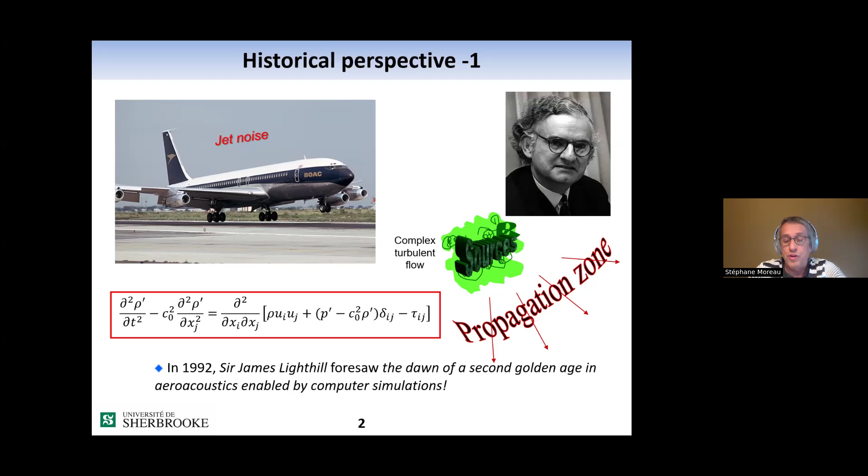But even if Sir James Lighthill was more of a theoretician, in 1992, in a seminar that he gave, I think at an ICASE symposium, he foresaw the dawn of a second golden age in aeroacoustics that was enabled by computer simulations. And indeed, 10 years later, two reviews, one in Progress in Aerospace Sciences by Colonius and Lele, and the second one in the Annual Review of Fluid Mechanics by Wang et al., showed the first CAA applications and also the potential of LES, large eddy simulation, for noise prediction.

Yet at the time, only simple canonical problems were tackled. I'm showing one at the bottom left, which is a shear layer simulation. Then at the top right, a forced jet without nozzles. And then the first wall-bounded case, a slanted flat plate trailing edge computed by Meng Wang.

10 years later, again, another review, this time proposed by Lele and Nichols, basically confirmed Lighthill's statement. They mentioned that we had reached the second golden age of aeroacoustics, and that the progression was from simple idealized configurations isolating specific unsteady flow processes to more complex flow problems with realistic geometry. They also mentioned that greater fidelity in capturing a range of turbulent flow scales, and thus the noise generation processes associated with them, was also apparent.

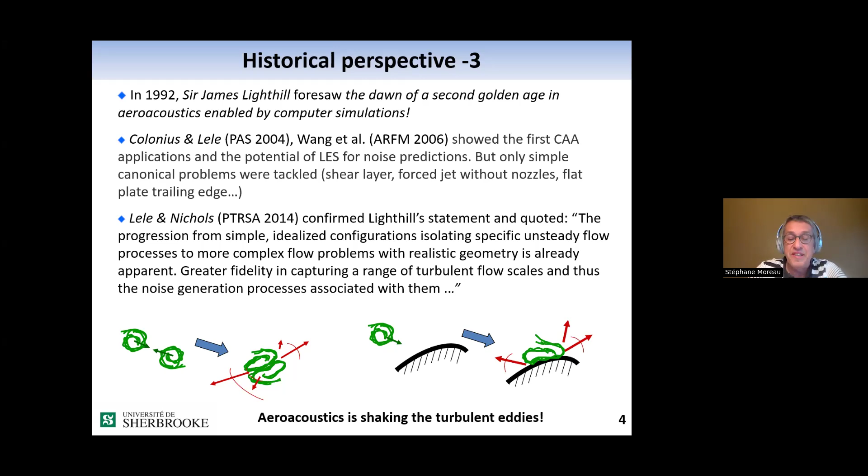Now, how do we simulate that? This is a sketch of all the numerical methods for noise prediction. To illustrate that, I'm splitting the problem in three steps, sketched on the left, where the first step is defining the excitation, which could be either acoustic or vortical. Then you can simulate or model the response of the blade. This will be the unsteady loading on the blade, which are equivalent dipoles that can then be fed into some analytical model or acoustic analogy to get the far field sound.

Now, all these steps can be analytical, and that will be the cheapest way of getting the far field noise. Or you can even provide some of the input data from classical CFD solvers performing RANS simulations. All of this analytical approach is cheap, but it's only for simple source mechanisms and very simple geometry. Actually, we always deal with flat plates, infinitely thin flat plates.

Now, if you want to move to more complex source geometries, we can start using classical CFD solvers on the actual geometry, and then we feed that to some acoustic analogy to get the far field. This is fine. This is a little bit more expensive because now you need to resolve the source region, but you cannot really capture any feedback loop mechanisms. And also you have a strong assumption on the propagation. You don't account for complex installation effects.

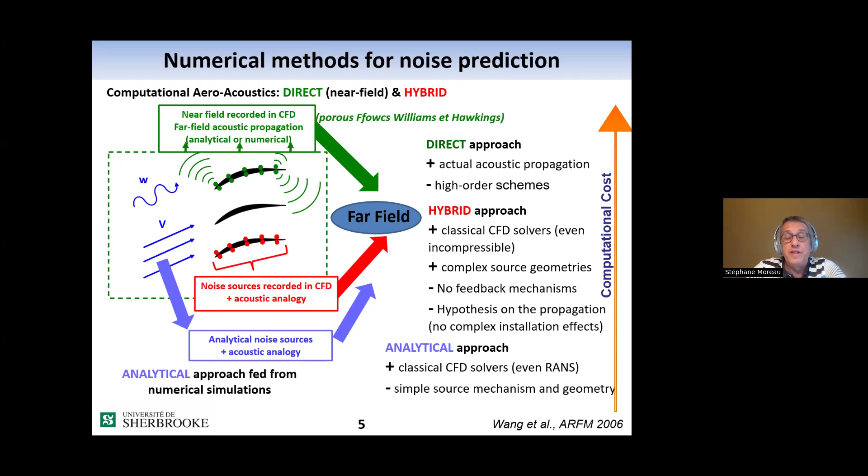All these ideas are basically summarized in the review by Wang et al. in the Annual Review of Fluid Mechanics. Now, going into the possible computational aeroacoustics methods. So now we want to simulate the acoustic sources either in free flow for jets or on solid walls. And we want to do some possible coupling, as I said, with an acoustic analogy for the far field

propagation. The simplest way, if we are interested in deterministic problems, will be unsteady RANS, where you compute the unsteady mean flow field, but with turbulence modeling. So you don't resolve any of the turbulence. Everything is modeled. Now, one thing that is important if you want to do a CAA problem, you still need to have low dispersion and low dissipation schemes. This is needed. And this will provide some tonal noise.

Now, we know that in most problems, it's not only a tonal noise problem, but also a broadband noise problem. If we want to resolve the turbulence, we have 2 options. Either we can use large eddy simulation, where we resolve only the large eddies and we model the small ones, or we resolve everything, which is the direct numerical simulation.

Now, there we have 2 options. One is using the lattice Boltzmann method, which will be very efficient, as we will show, for low Mach number flows, because we use a very compact stencil for it. And again, we will benefit from low dispersion and low dissipation for the acoustic propagation, or we need that.

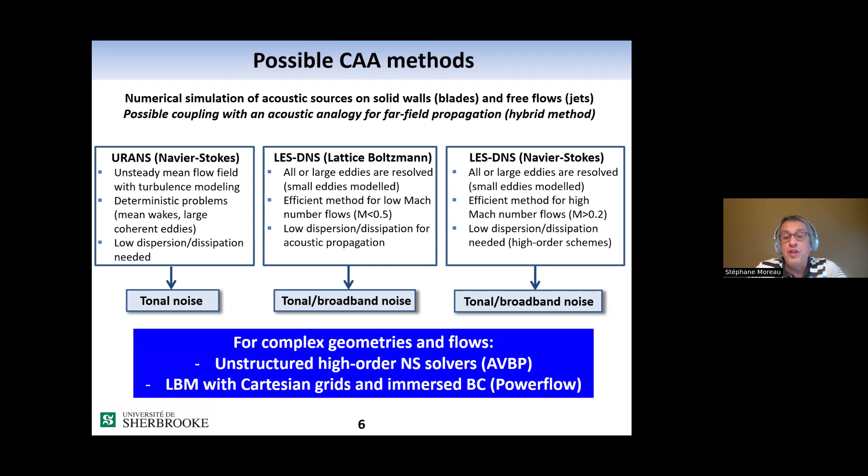Now, for complex geometries and flows, which is really the main focus nowadays, 2 methods have emerged as good solutions. One is the unstructured high-order Navier-Stokes solvers, and I will give examples with the AVBP solver, and the lattice Boltzmann method with Cartesian grids and immersed boundary conditions. And I will give examples with PowerFLOW.

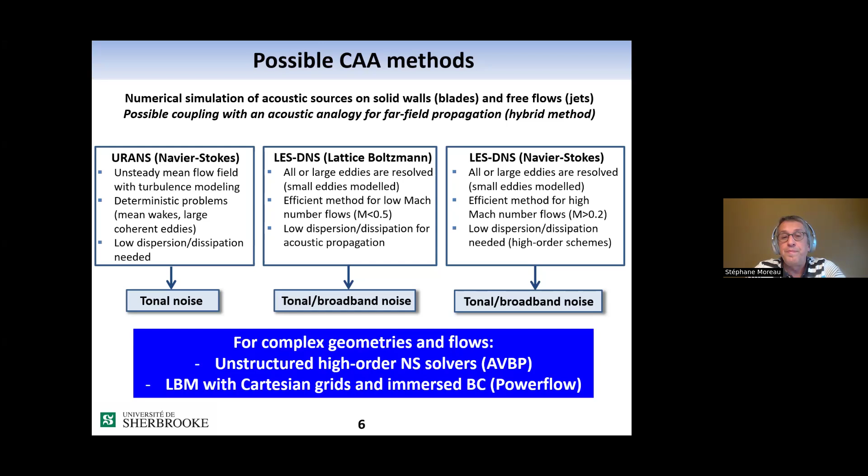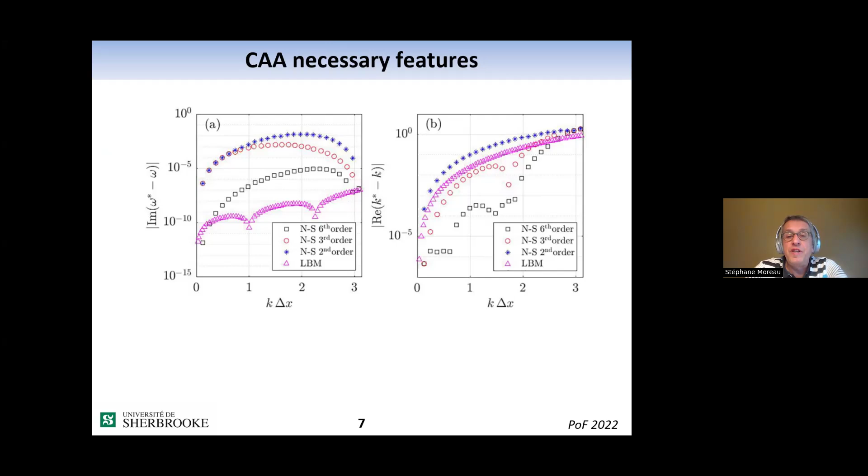Now, I mentioned in all these CAA methods, we need to have low dispersion and low dissipation, which are 2 properties required for a CAA problem. And here I'm comparing classical Navier-Stokes finite difference schemes with the lattice Boltzmann method. On the left, I'm showing the dissipation properties. And you see that the LBM is better, actually, or equal to the 6th order Navier-Stokes finite difference scheme. And in terms of dispersion on the right, it's equivalent to a 3rd order scheme.

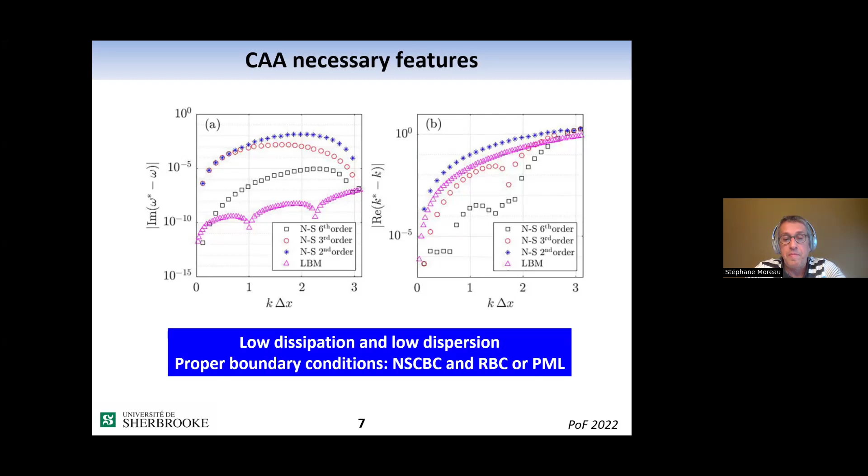So the other thing that I want to insist on: not only do you need these properties for the schemes to be able to simulate properly the noise sources and propagate them, but you also need to have the proper boundary conditions. And for that, you need non-reflecting boundary conditions, like the Navier-Stokes characteristic boundary conditions or the radiative boundary conditions developed by Tam. Or you use absorbing, so perfectly matched layer boundary conditions, which are absorption sponges, basically, to absorb acoustics. So you need that.

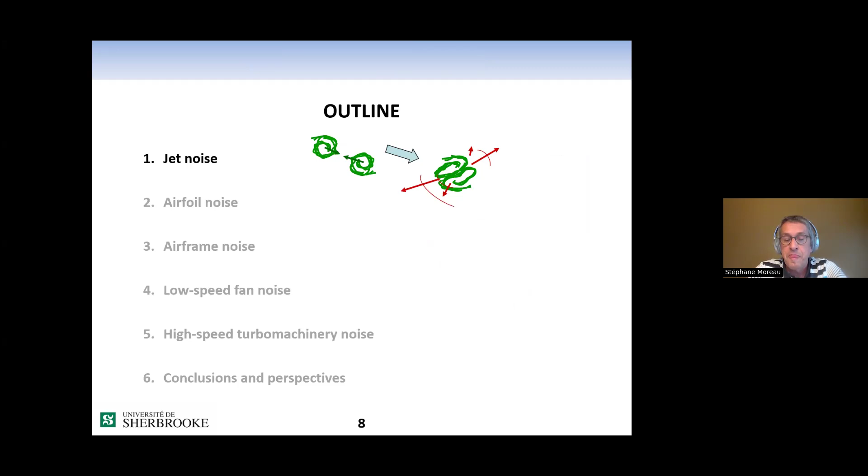Now, let's get into some of the applications, starting with the first case where we have just colliding turbulent eddies, so free flow, and I will consider jet noise, which historically has been, I would say, the main workhorse in aeroacoustics. Now, what we're able to do nowadays is to simulate cold and hot jets with nozzles. And I'm going to illustrate that on 2 different nozzles, one strongly convergent, the ARN2 nozzle from NASA, and the slowly converging nozzle from Jean, that was tested at Pprime in Poitiers.

And I'm showing at the bottom some of these unstructured grids. And one particular feature that we've been developing is to be able to do automatic tripping by removing some of the grid cells near the nozzle exit, which I will call an industrial tripping device. And to be able to evaluate how we perform, I'm going to look not only at the center line of the jet, but also at the lip line, which is the critical one, and also the radial evolution of this jet.

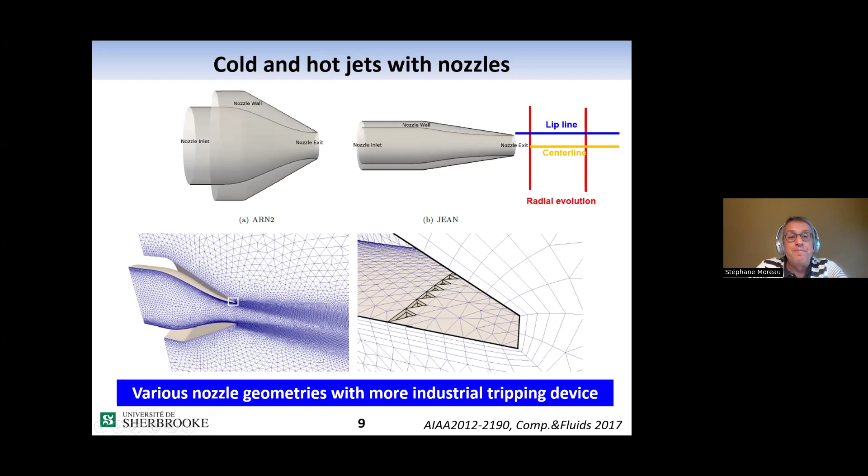So first, starting on the center line, top left, I'm comparing basically the mean flow along the center line on the left, and then the RMS on the right. The symbols and the black line represent Bridges' experimental data, and the pink squares represent the experiment from Jordan, so from P prime. And in red, you see that we are capturing now really the potential core quite well.

And that's actually a significant improvement even compared to the first LES simulation that Bodony performed in his PhD. And you see also, comparing the red and the dashed blue, the difference between a hot and a cold jet. Now, in terms of RMS, we see that we are also capturing quite well the evolution of the RMS and especially the peak.

Now, on the more critical lip line at the bottom, we see that we capture also the mean flow quite well, the evolution, compared to Bridges' experiment, and also the RMS. So now we are also able to capture the evolution along the lip line. And in terms of radial evolution, here I'm comparing only to the P prime experiment, all the RMS values for the three velocity components. And you see that we're actually matching quite well the evolution and the ratio between the different components.

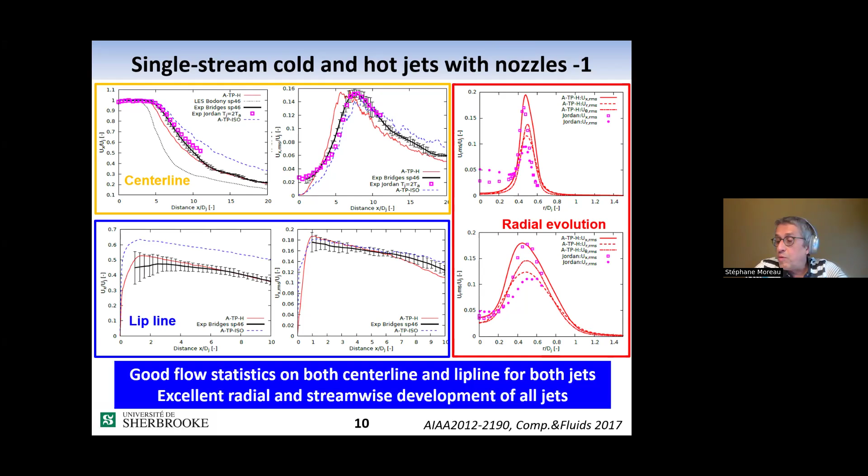So overall, we have good flow statistics on both centerline and lip line, and we have excellent radial and streamwise development of all jets. Now, what about the acoustics? Here I'm comparing spectra at three different angles with respect to the jet axis, and also the overall sound pressure level as a function of this angle. You see that for the three different angles, we are actually comparing very well with the P prime experiment. And you see also the difference between the hot and the cold jet.

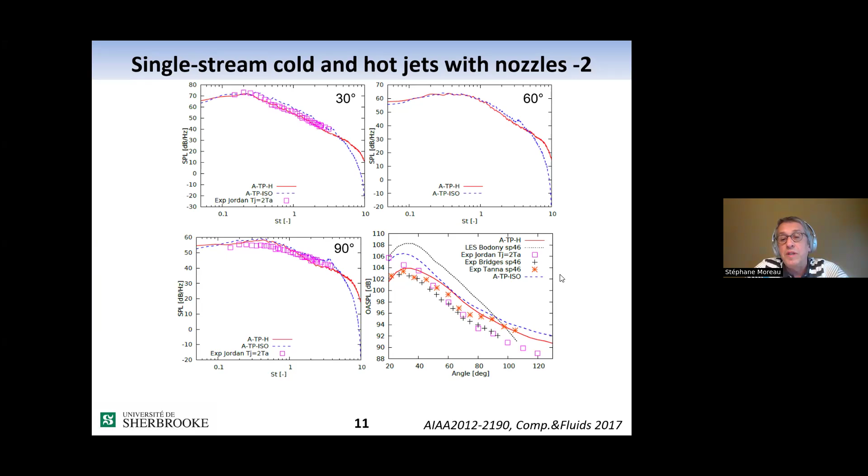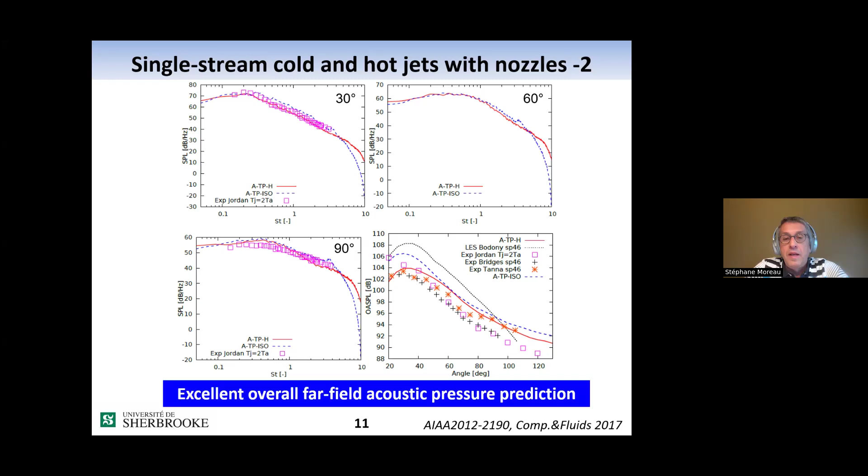Now, in terms of overall sound pressure level evolution in terms of the angle, we see also that we are matching quite well with all the experiments from Jordan, Bridges, and Tanna. And again, there is quite a significant improvement compared to the first LES by Bodony. Now, this is for single stream jets, subsonic ones.

What about supersonic jets? Here I'm comparing another simulation we performed on an under-expanded supersonic jet that was tested at École Centrale de Lyon, at the LMFA lab, and also at VKI, by the way. And I'm comparing on the left the flow field, so the evolution of the mean Mach number along the axis, and the level of URMS also along the axis.

On the center line and lip line, you see that we capture very well the shock cells, and we achieve a better comparison with the experiment, especially for the latest shock cells, and also our capture of the lip line is much better.

And now on the right, you see the acoustic prediction for all different angles, and you see that we match very well, actually, the LMFA experiment, except that because of the tripping, we don't have the tones, so we don't simulate the screech, but we have the broadband captured very well.

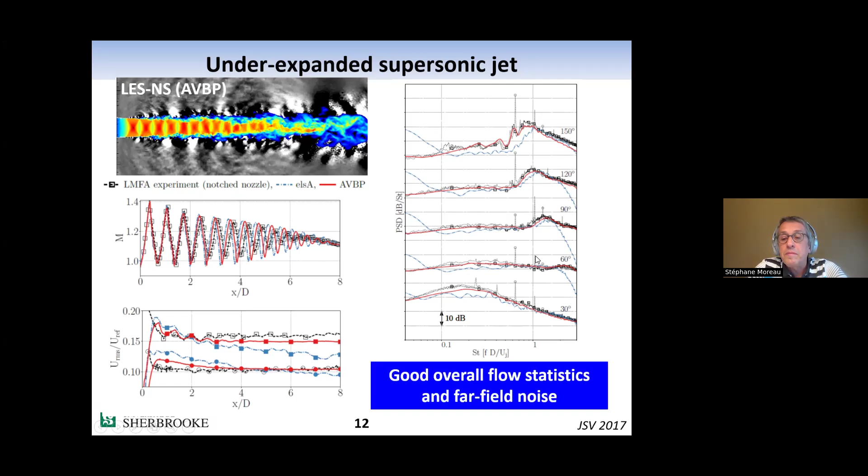Now, moving to the very realistic one, where we compute the dual stream jet with nozzles. Here I'm comparing with the EXEJET test that was performed at Onera, which is a scaled version of the afterbody of the CFM56. On the left, you see that the AVBP simulations are comparing quite well to the PIV measurements performed at CEPRA 19.

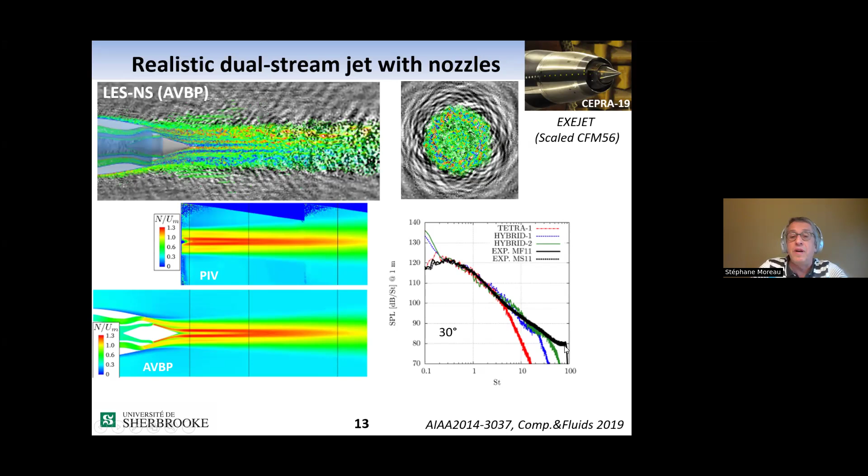And on the right, you see also the sound pressure level as a function of Strouhal number. And you see that with increasing grid resolution, we capture the high frequency very well. So we have good flow and far field acoustic pressure predictions with this industrial tripping method. Now, where do we go from there?

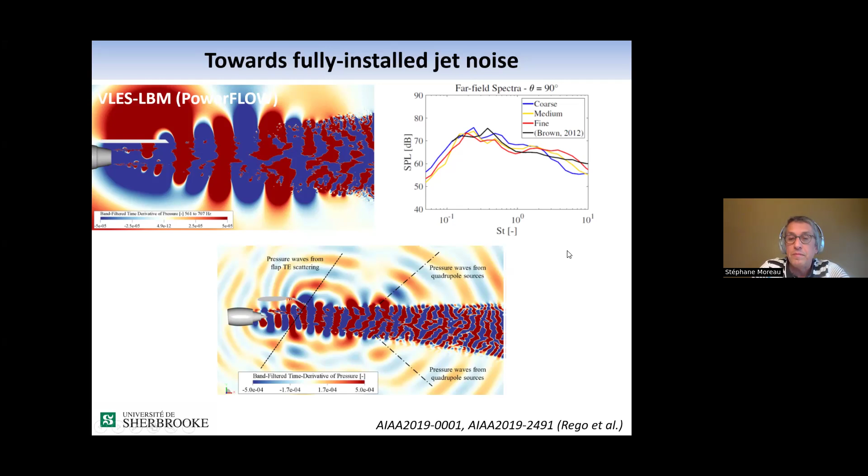And then a more realistic configuration where there is a high lift device put above the jet. And again, we get very good prediction and accurate description of the interaction. These are all simulations performed by Rego et al. Now, moving to the second case, where we have an interaction of turbulent eddies with a wall.

The canonical model for that canonical problem is the airfoil noise first. And in this case, we actually try to simulate what happens in actual open jet wind tunnels. And I'm showing on the right our wind tunnel at the Université de Sherbrooke. And on the left, I'm showing a typical instrumented mock-up, and this is the controlled diffusion airfoil that I've been using for many years, and I will be comparing to that. And the trend basically since 2012 has been to move towards more DNS cases and fully installed configuration to also sort of understand what's going on in the experiment.

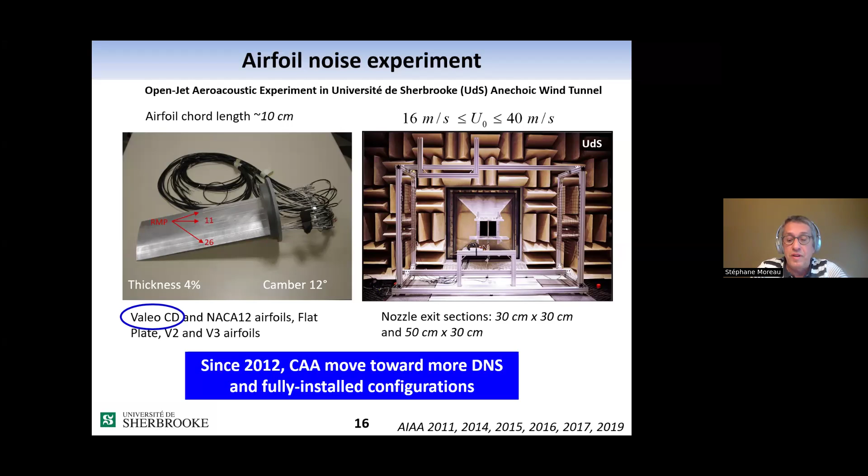Now, this is what I mean by installed configuration. This is basically the lattice Boltzmann setup that we use, where we basically place the airfoil in the potential core of the jet. We simulate the nozzle lips here, and this is basically the École Centrale de Lyon setup, so with a little contraction in one side. If you do that, actually, you're able to capture quite well the loading on the airfoil. If you do free flow computation, you don't, okay? And you see that all this high fidelity simulation, so LES and DNS, are comparing quite well actually with the experiment.

The only differences are mainly in the laminar separation bubble that is developing at the leading edge that we see actually in the animation at the bottom. And you see that only the DNS are actually able to capture the size of this bubble quite well, and also the consequent favorable pressure gradient region that you have in the front of the airfoil.

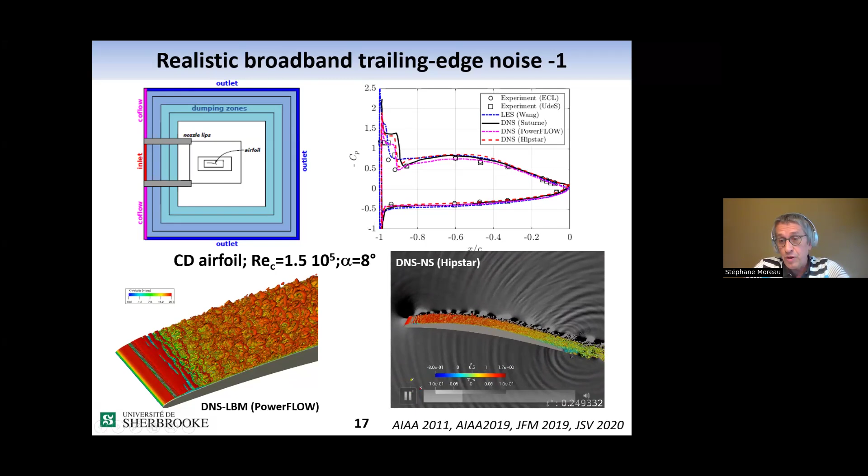Now, in terms of features, as I mentioned, we have this very thin laminar separation bubble that develops. You have these rollers that will form, that will eventually break down, and then you have a forest of hairpin vortices developing along the blade with an angle that will be increased due to the APG zone near the trailing edge. Now, on the right, I'm showing also in the background in gray the dilatation field, and you see that actually for this particular airfoil, the self noise is not only trailing edge noise, but you have also an additional source coming from the laminar separation bubble, and also another one that is developing actually in the wake.

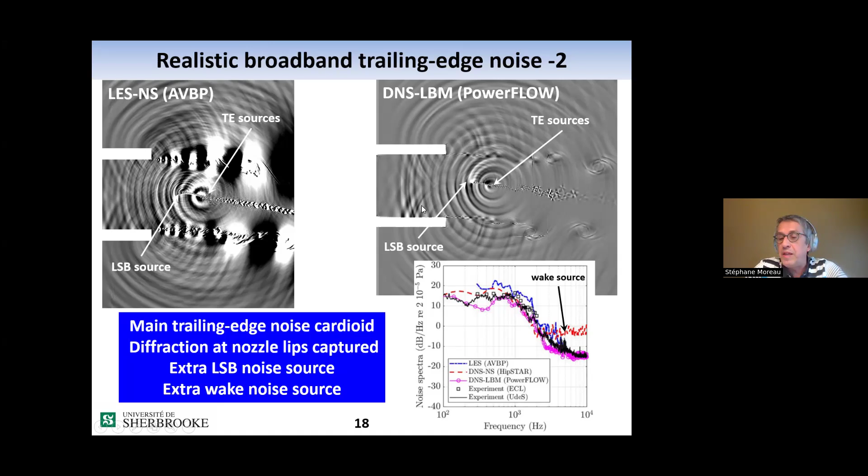Now, if we consider the other cases, so the LES Navier-Stokes with AVBP, we get basically the same sources, okay? And you see also the same thing with PowerFLOW. Now, if we compare to some experimental measurements of the far field noise spectra, you see that now we're able, with this high fidelity simulation, to capture quite well the trend. And as I said, because we have this installation, we also see the diffraction at the nozzle lips very well. We also see the sort of cardioid shape due to the non-compact trailing edge sources. And then we have these extra noise sources due to the laminar separation bubble and the wake. This was at design, so at 8 degrees.

Now, if we move to a lower angle of attack, experimentally, we saw that we were getting some tonal noise, and especially at 5 degrees, we had some very intermittent, so highly modulated tonal noise. And we performed the simulation of this case, and you can see in the background this tonal noise generated with the fading colors, showing that this is actually a tone that varies in time.

And we were able to explain this phenomena with the DNS, where we showed that we had a sequence of quiet events and intense events near the trailing edge that were due to these rollers that were either small, smooth, and not very energetic, or big, strong, and creating a strong breakdown near the trailing edge. And that's basically creating this laminar boundary layer instability noise.

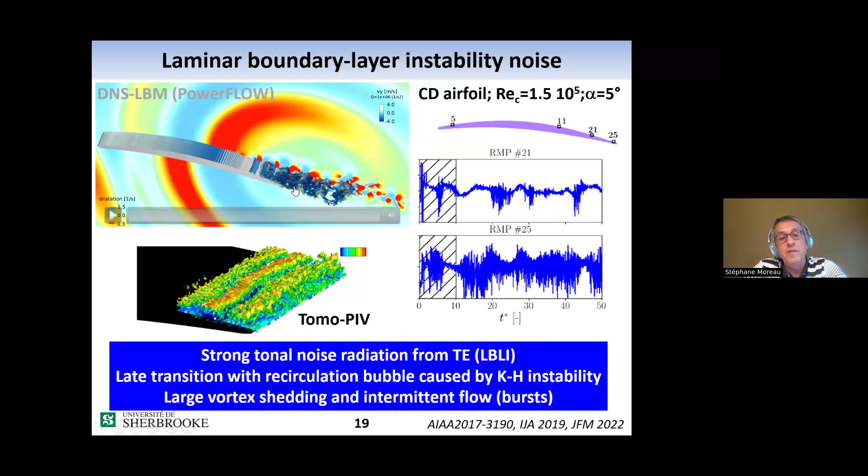And the main source that we found was the Kelvin-Helmholtz instability that was developing in the laminar separation bubble that is situated close to the trailing edge at this particular angle of attack. Now, these rollers were actually verified experimentally by tomo PIV, where we showed that we had these big structures and confirmed the DNS LBM results.

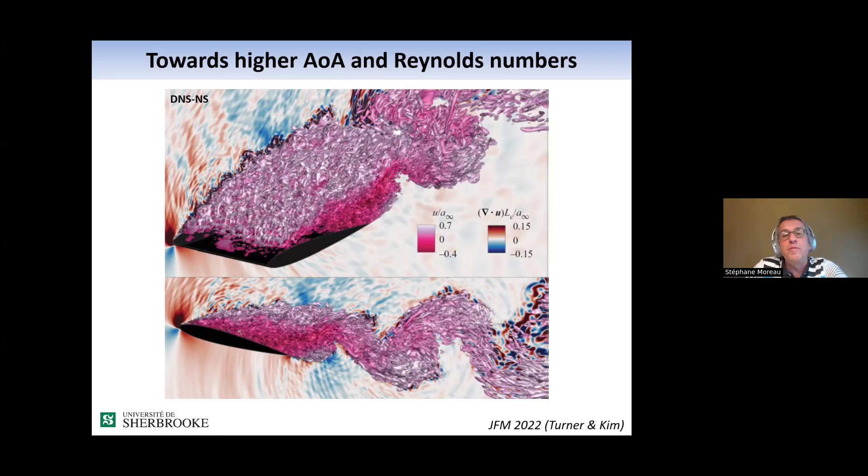Now, where do we go from that? Now we are actually moving, I would say, towards higher angle of attack and Reynolds number. And I'm showing here an example that was performed in 2022 by Jacob Turner and Kim, where they performed basically this very high angle of attack DNS, but it's still at a quite low Reynolds number. So I think the trend will be to increase the Reynolds number and also consider more high angle of attack.

Now moving to a more complex case, airframe noise. We did first a full simulation of a simplified high lift device where you have basically a flat plate with a flap, which is a NACA 12 airfoil with different positions. And we basically simulated, that was part of an EU project called Valiant. And some of the experiments were performed at École Centrale de Lyon. And that's basically the configuration we've been simulating with AVBP.

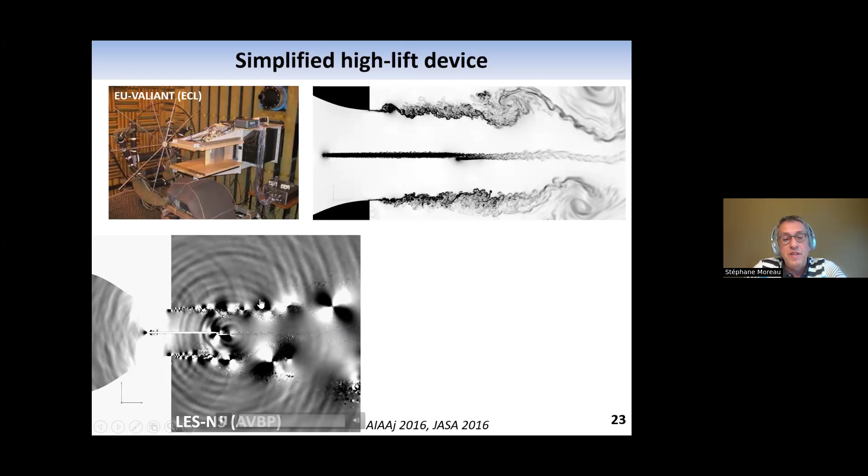And you see basically the evolution of the flow field and also of the acoustic field. So this is again dilatation field contours. And what we showed is that we were able to have good flow statistics and far field with AVBP. We showed that we had a strong influence of the jet shear layers here, because you see that there is a sort of a change of orientation, so refraction through the shear layers. And then we have also diffractions coming from the nozzle lips. And all of this will create the oblique fringes that we see actually in the experiment.

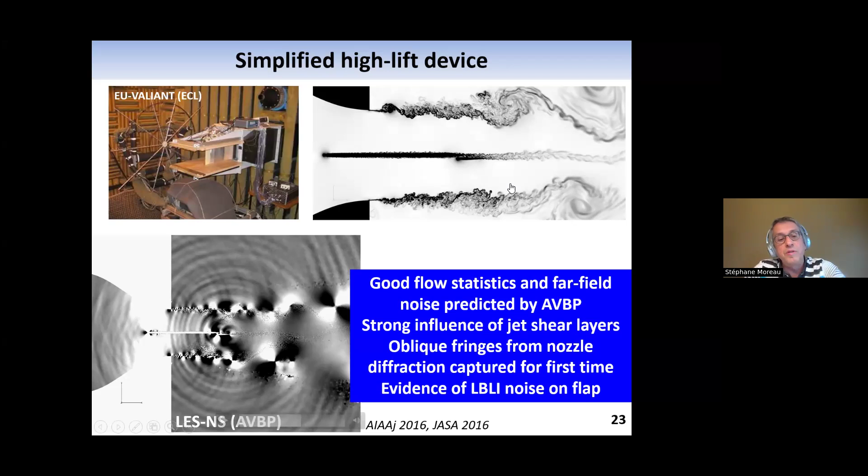And then the other thing that we explained was basically we saw some evidence of laminar boundary layer instability noise on the flap because of the low Reynolds number of this guy. And that was actually shown also experimentally.

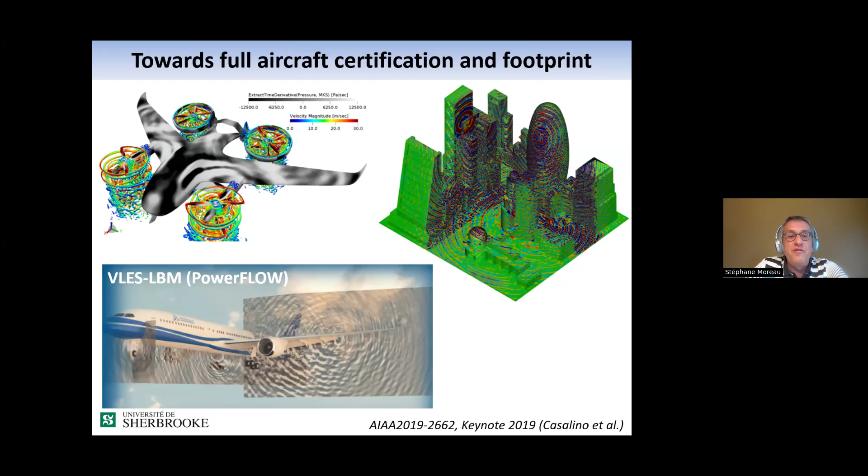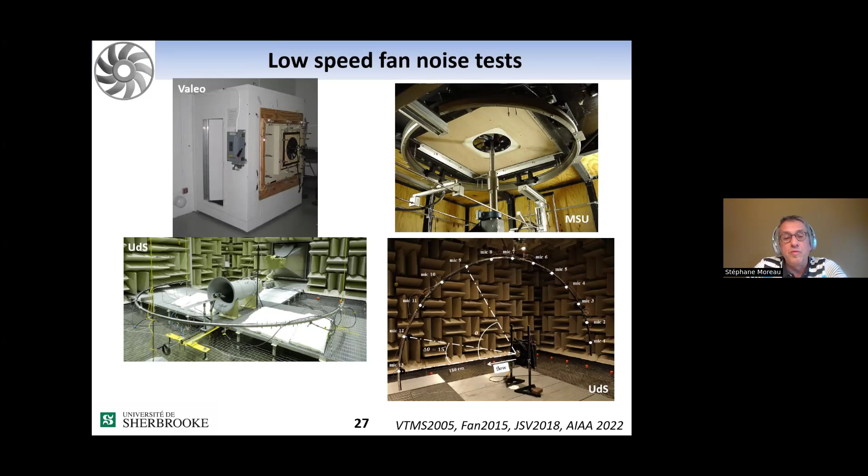Now, moving to the more complex rotating machine cases, and starting with the low-speed fan noise. And for this, we usually simulate the configuration of the fan as it is tested, which is usually flush mounted in a board or mounted on some module, as shown at the bottom right. So I'm going to show some examples of these two.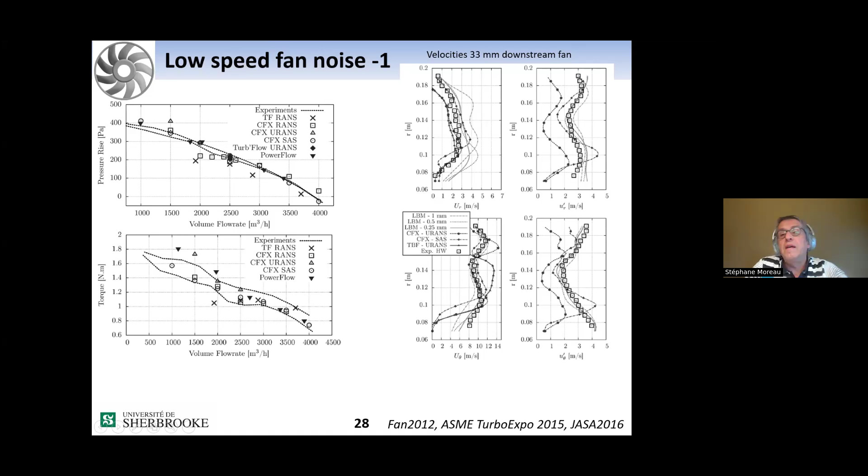Now, this is confirmed also by comparing the detailed velocity statistics in the wake, where we did some hot wire measurements 33 millimeter downstream of the fan. And especially, I think, only the highly resolved simulation and fine simulation were able to capture actually the radial component correctly, and also the RMS value of it, and basically the shape also of it as a function of radius. So good overall performance agreement, better prediction with unsteady SAS and LBM cases.

Now, the most, I think, important results that we obtained on this fan was the issue of having huge subharmonic humps. So this is the blade passing frequency here. The tone that is emerging, and the other in front of it, you see that you have these huge subharmonic humps, and we have three of them, okay, that are sort of a harmonic of the first one.

So in black is basically the experiment, and you see in colors all the other results from the lattice Boltzmann simulation, coupled with the Ffowcs Williams-Hawkings analogy for all the cases in blue, green, and brown. In red, it's the direct simulation, and you see that at the low frequency, we have some extra tones here, and this is due to the fact that we have this mass flow extraction. So these are duct modes that are actually excited at the outlet. So this is a spurious effect of the simulation.

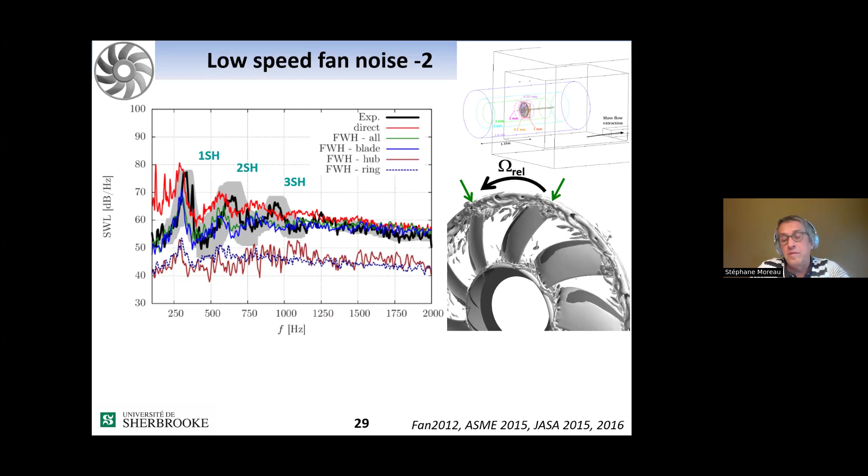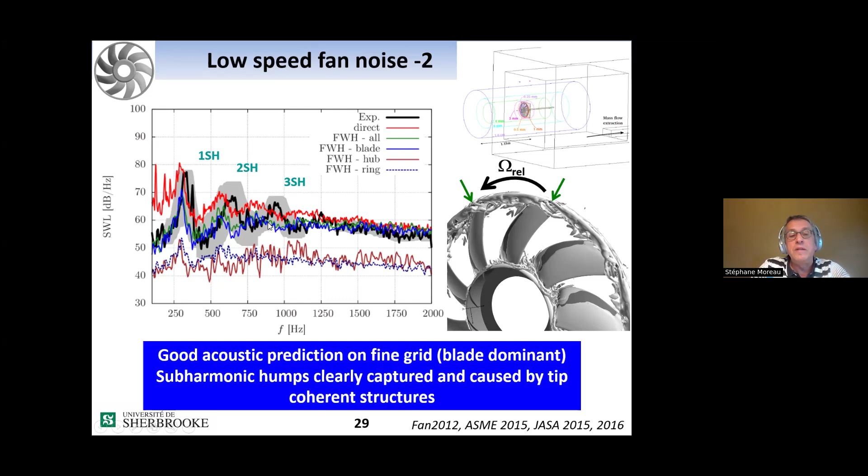But you see that all our simulations, either in the direct case or in the acoustic analogy, are now predicting quite well actually the three humps. And we were able to basically explain these 3 humps by these large coherent structures that are forming in the tip gap that are re-ingested and chopped basically by the blades. So these subharmonic humps are clearly captured and caused by the tip coherent structures that are formed. Now, one other thing I forgot to say is that also we showed that the blade is really the dominant contributor compared to the hub and the ring.

Now, this has been found also in other cases, and I'm showing here a more recent simulation we did on some urban air mobility ducted fan configuration that you see on the top left, tested in our anechoic tunnel. And you see at the bottom the prediction, the sound pressure level, so the noise spectra comparison between experiment in red and purple, compared basically to all the LBM. And you see that we are actually able to capture quite well all the phenomena. And again, we capture quite well also the subharmonic humps that were forming on this fan.

And we then explain that by the tip vortices, both the tip leakage and the tip separation vortices that stay in the rotational plane and that are creating this intense wall pressure fluctuation at the tip and creating consequently these large subharmonic humps.

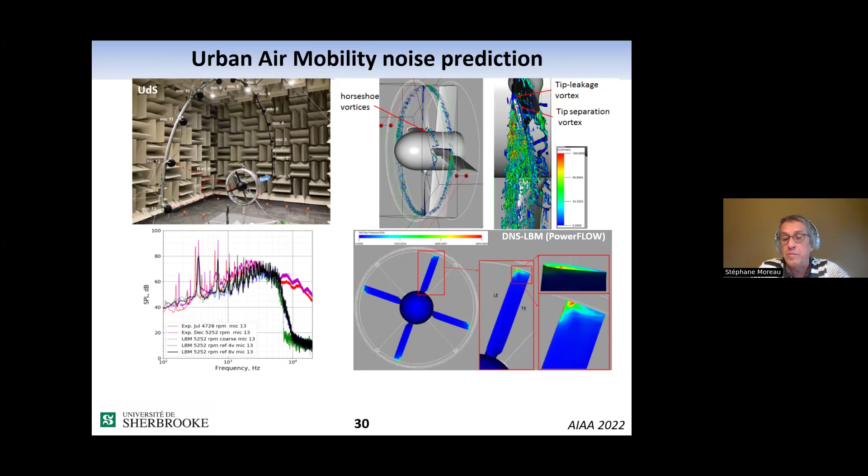And you see that we have a very different flow topology. In the deep stall, we have all these vortices that are basically impacting on the mast and on the consequent blade that are sort of re-ingested, whereas at max efficiency, everything is basically triggered by impact on the side plates.

And you see at the bottom basically the comparisons of the noise spectra again for these 2 configurations. And you see that the Lattice-Boltzmann method is capturing quite well. So either with the Ffowcs Williams-Hawkings analogy in blue or the direct probe in gray, we are basically capturing the black experimental spectra for both cases. So we get good noise prediction, and again, this allowed also to have a good source localization.

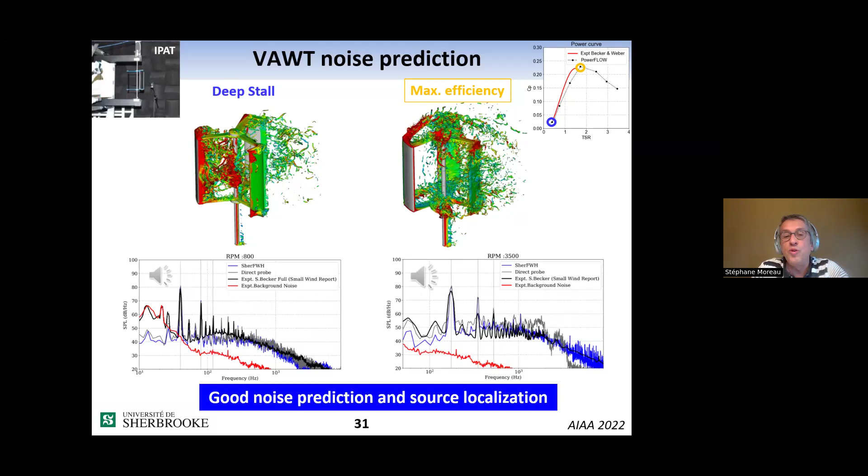Okay, to conclude this part, we've done also a systematic comparison on this H380 C1 fan, where we moved actually from a single fan simulation to a fan system and then a fan system plus a rotating obstruction.

So we are getting more and more complex cases. And I'm showing on the right all the simulations we performed with different flow solvers, the grid size also, and more importantly, the duration of these simulations. And you see that for the fan itself, all the unsteady simulations are the same order of magnitude, okay? Except, of course, the RANS, but the RANS doesn't give you the noise directly. But all the others are the same order of magnitude for the same number of revolutions of the fan.

But as soon as we move on to the fan system, and more drastically, I would say, the fan system plus rotating obstruction, we start having quite a big difference, as we see that the LBM with the fan system is about 1 order of magnitude, so 10 times faster than the URANS, and then we get even 2 orders of magnitude in the case where we also consider these 2 rotating systems. So this is, I think, for low speed applications, an increasing advantage of the Lattice-Boltzmann method over the classical Navier-Stokes with system complexity.

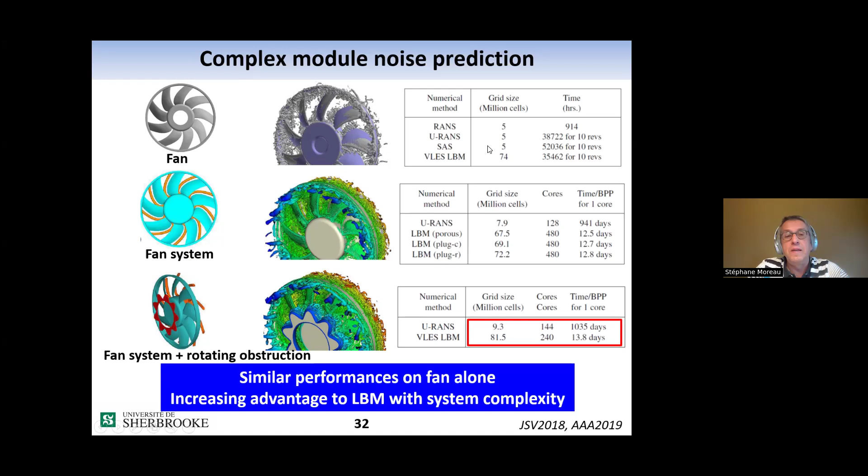Now, this is for low speed machines. If we move to high speed machines, the first case we considered was a compressor, the low pressure compressor CME2. And I'm showing here on the left the large eddy simulation we performed on a smaller span configuration, and on the right the URANS we performed on the complete stage.

With this configuration we didn't have any experimental data, but we showed some technological effects on tonal noise with the URANS, especially the effect of viscosity, thickness, and camber, so that we could estimate the validity of our analytical models. And we also showed the critical role of the span-wise coherence length in the broadband noise. And by the way, it was also surprising to see that transition was only occurring at mid-chord, especially on the stators, and not really at the leading edge as we were expecting before.

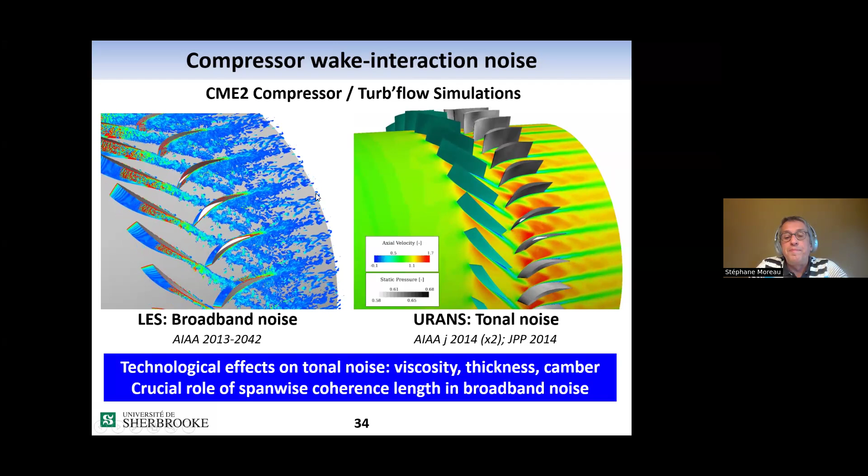Now, the second case was a high-pressure turbine case, which is the MT1 transonic turbine from Oxford. And we did there both clean inflow and also inflow with some planar entropy waves. So this is the clean inflow at the bottom left. This is the entropy wave case on the right. And you see that in this HP turbine case, we have very complex flows with several shock waves, vortex shedding. So a lot of possible noise sources that we looked at.

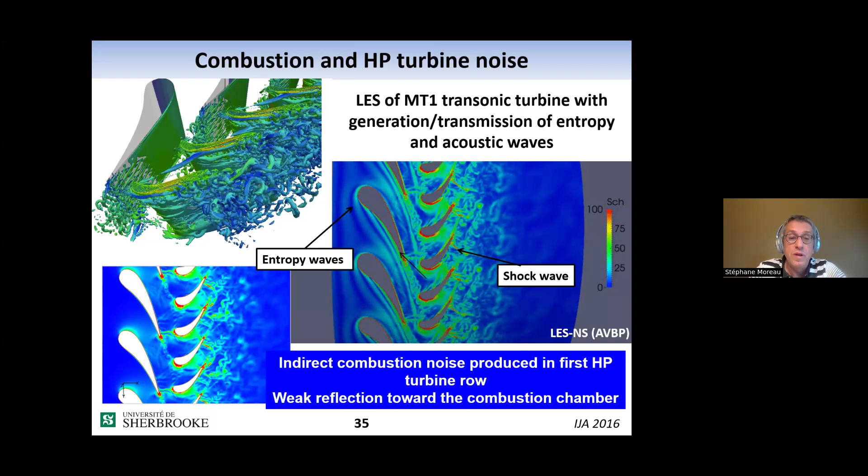And we especially showed, by comparing the entropy wave case and the clean case, that indirect combustion noise is produced mostly in the first HP turbine row, because everything afterwards, the entropy is completely, I would say, smeared. And then we also showed that we have weak reflection towards the combustion chamber, which is also very good news, but that was a result that came out of this study.

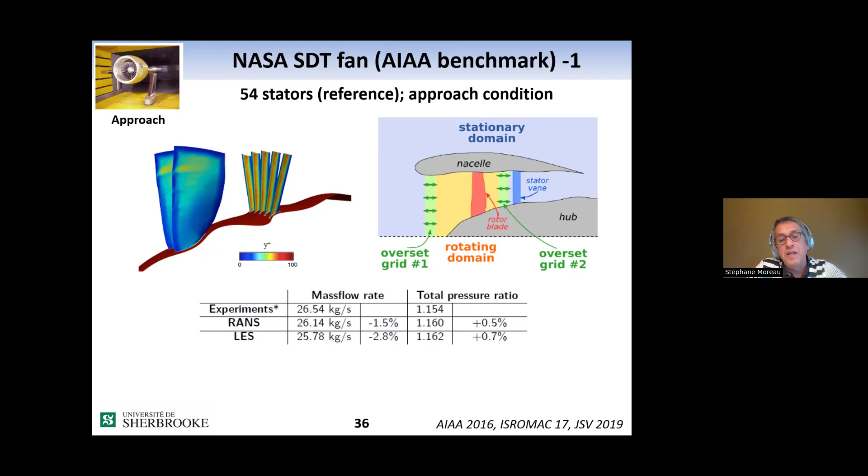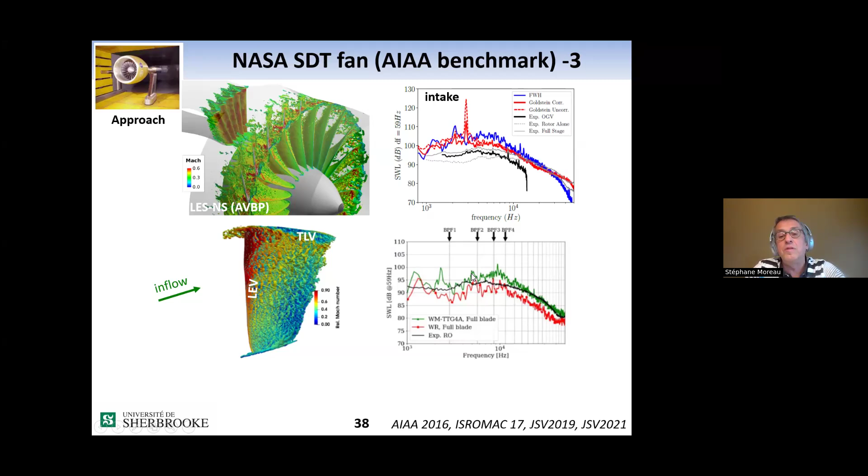And you see that the red wall-resolved LES is now matching much better the rotor alone measurements, and we no longer have these extra humps or quasi-tones that we found before. So now we have a good overall prediction using this Goldstein annular duct analogy.

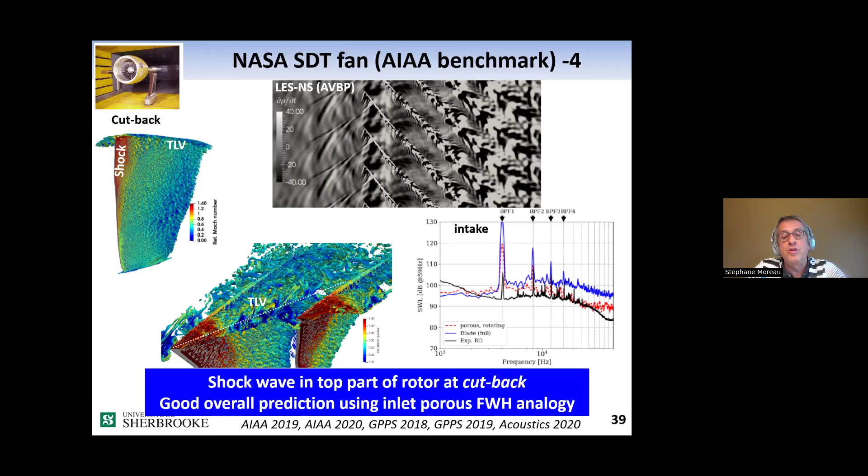Now, where do we go from there? Actually, first, we then performed the same thing for the cutback case. And I will go quickly on this because it's already, I think, 40 minutes. And we are comparing, again, quite well with the experiment. And we were showing that we were able to resolve also the tip leakage flow and the interaction with the blade.

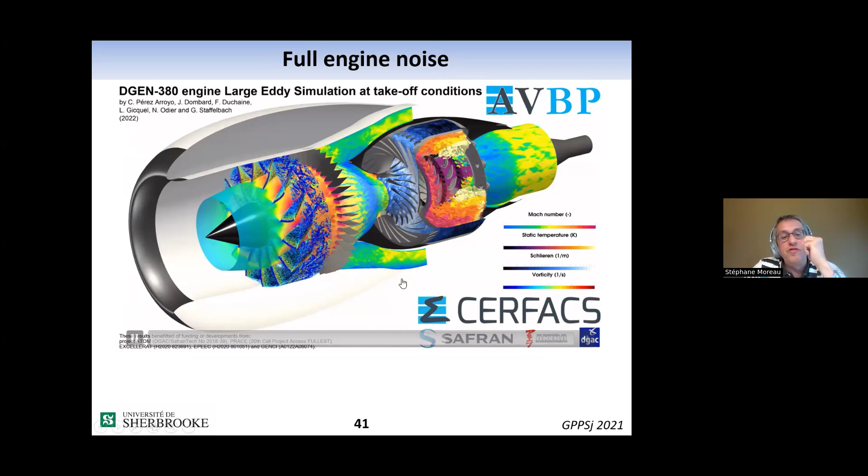Now, I would say the final case that I will show is the very recent full engine noise simulation that was performed at Cerfacs, where basically they simulate with wall-modeled large eddy simulation the full DGEN engine. And you see basically everything is resolved with large eddy simulation, the combustion chamber, the axial turbofans, and also the HP centrifugal fan. So this is basically the new frontier in CAA with coupled stages.

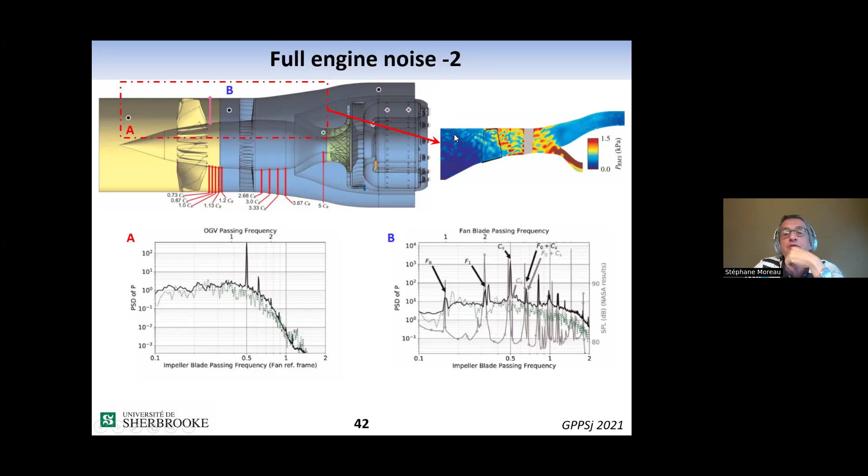Now, the thing that we learned actually from this simulation, one thing that was measured at NASA is that upstream they found some blade passing frequency that they were not expecting, that were not corresponding actually to the turbofan. And this simulation showed basically that it's actually a coupling with the HP centrifugal fan. And these are basically acoustic pressures that are coming from this centrifugal fan going through the axial fan stage, and that you basically capture in point A. So significant effect of the coupling at certain lines, and only by this full simulation you can get it.

So in conclusion, several CAA results in complex geometry have been achieved, combining both hybrid and direct noise simulation. And I hope I convinced you that the third golden age has started. So a very exciting time, I think, for CAA. We're able to simulate more complex and realistic geometries, and especially with the lattice-Boltzmann method. The high order schemes on unstructured grids also provide excellent results for all types of jets, and now also high-speed turbomachines and open rotors. New physics has been unveiled, and common noise mechanisms found from airfoils to low speed, which bring new insight, I think, also into high-speed turbomachines.

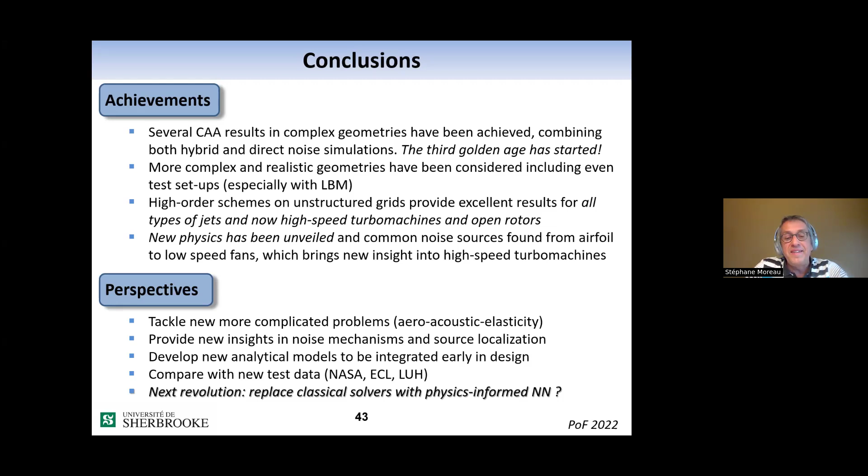Now, where do we go from there? So the perspective, we should tackle, I think, new and more complicated problems. I think the fourth golden age should be something like aeroacoustic elasticity problems. We should continue to provide new insight in noise mechanisms and source localization in different configurations. And we should also develop new analytical models based on these simulations to be integrated in early design. And then, of course, you should compare with new test data that are becoming available, like the ECL5, also the configuration at Leibniz Universität Hannover. Now, one thing may be more controversial. I think maybe the next revolution will be also to replace the classical solvers with physics-informed neural networks.